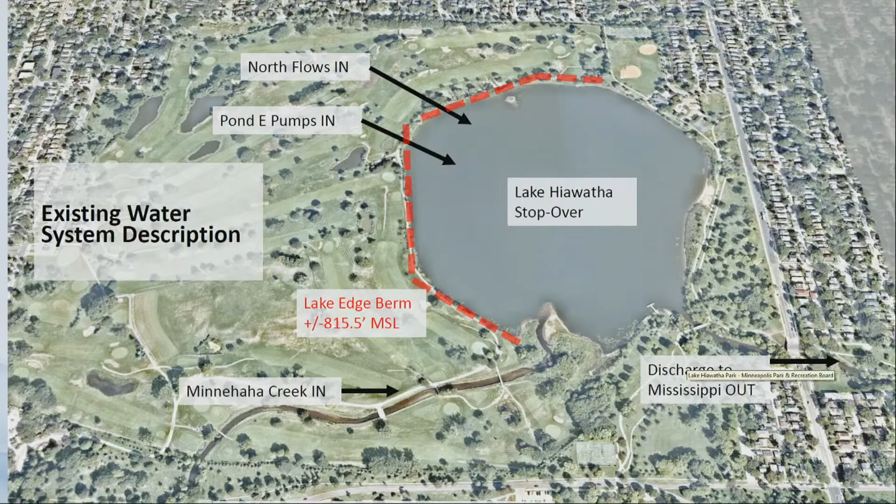North side, you've got flows coming in off of the urban watersheds that flow directly into the lake where they stop over. And then there's flows that come into the golf course ponds, and they're actually pumped up and over the berm into the lake, and they go down to the Mississippi. So there's 3 main sources in, 1 source out, and there's a berm on the edge at elevation 815.5. So that means there's about 2.5, 3.5 feet of freeboard on that shoreline. I happened to be out there last night, and that's about exactly what it looked like.

So over time, with more development, more urbanization, there just happens to be more flow. You could also argue, global warming or not, that there's more rainfall as well. And so more flows coming down Minnehaha, more flows coming off the urban watersheds, and the lakes have to operate higher. And what I mean by lakes, both Hiawatha does, and to the south, Lake Nokomis does as well. Because if you released more water from Nokomis, it would actually pile up Hiawatha higher.

And it's funny because Nokomis is actually just a little bit higher than Hiawatha, and there's a chance to maybe connect the 2 things together, as Tom Oslin had said, and sort of have a 2-for-1 benefit by what we're going to show you tonight. And then one of the park board's main goals I hear over and over from a lot of you is we need to reduce the amount of groundwater pumping.

Because as I showed in the earlier YouTube presentation, Minnehaha Creek comes down, it ends up in the lake, it leaks down into the area underneath the golf course, it mounds. We pump it up to the lake, it leaks back down. We pump it up to the lake, and so that just pumps in a circle, and that's the $5,000 a year or so in electricity costs to pump that water back up and keep the golf course and the residents dry currently.

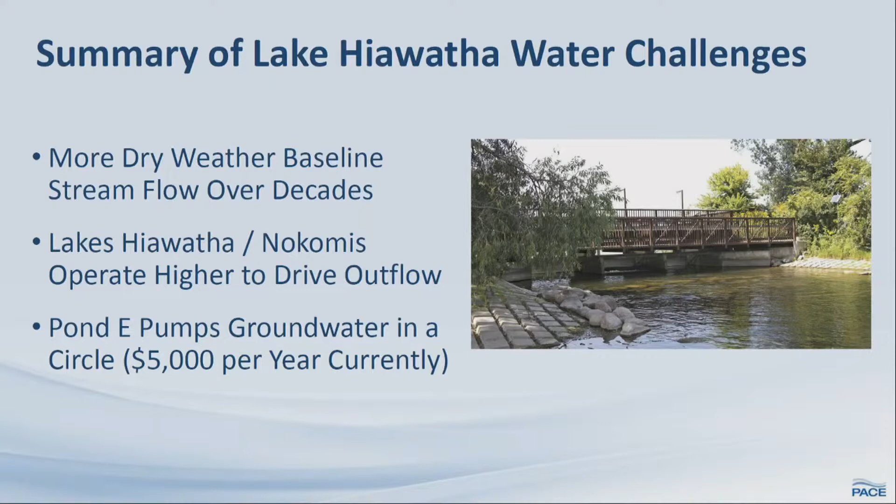So why can't we get more water out of Hiawatha and just solve that problem easily? As Barr pointed out, this is a figure from their report. Here is a profile of the ground at the bottom of Minnehaha Creek downstream of Hiawatha on the way to the Mississippi River. Water at Lake Hiawatha is at about elevation 812. And as it wants to flow out by gravity, it runs into restrictions at 28th, 30th, and further downstream.

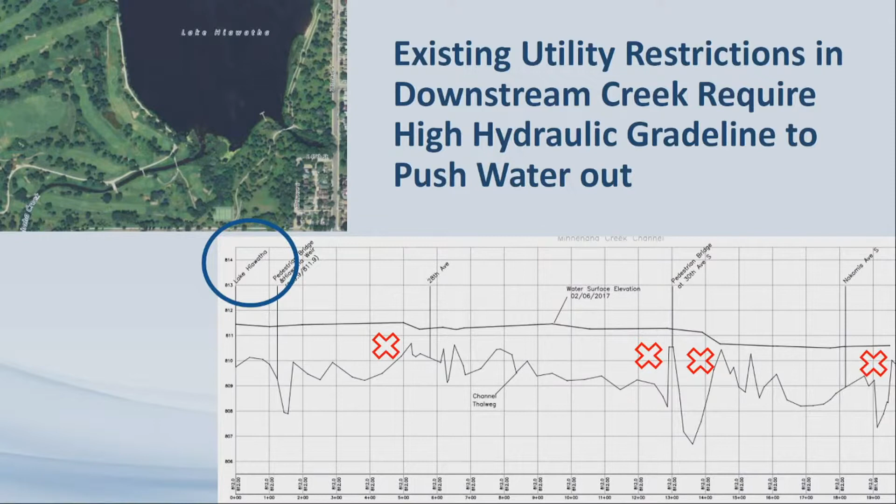And so in order to solve that problem, the city of Minneapolis would have to go in and remove large sewer tunnels and gas lines and things like that that are pretty much infeasible. And so the master plan rightfully pointed out that long term, the only way out of this mess is to raise the water surface. So we got to raise it in Hiawatha, we got to raise it all over the place in order to drive this water out. And I fundamentally agree with that.

But when I read the Star Tribune article 7 or 8 weeks ago, and I'm just a volunteer for 7 weeks on the job, if you will, I thought to myself, if you're going to solve a flood problem, why would you pile more water up? And that's kind of what alternatives 1 through 5 do. They store the water on the golf course.

And so here's the lake over here on the right. The water would then pile up the way it's supposed to, but then it would back water on top of the golf course, so it would be seasonally flooded when flows come in, and it would be permanently wet on a large majority of the land. And I'll show you a plan view here in a minute. So that causes more basement intrusion in the surrounding properties.

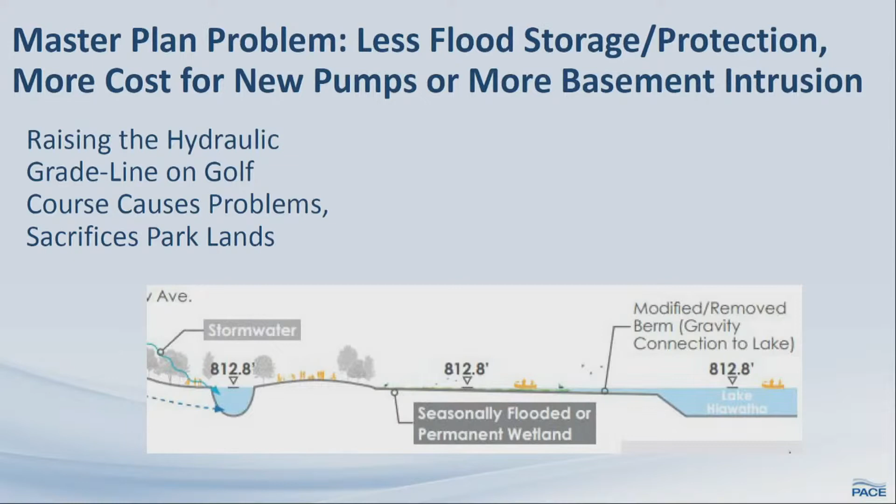There's some houses on the northwest corner that are very low, and they rely on that pumping to prevent flooded basements. But more importantly, when water comes down, it's coming down heavier and heavier every year. It used to be 300 cubic feet per second, then it went to 400, then it went to 500. A lot of water's coming down. We need a place to put that water.

So, as I said before, 5 alternatives from the Barr report. I just chose arbitrarily alternative 4, and that's what's shown here in front of you. And as I said before, the solution, if you don't look at the black arrows that I drew here, was to essentially bring the water in from the northwest, store it on the golf course lands, and then they had proposed actually an open channel, a new opened creek, if you will, to put some of the flows into the lake. And then you have Minnehaha flows doing what they do, which is to go through the lake and out. So those are alternatives 1 through 5 in a nutshell.

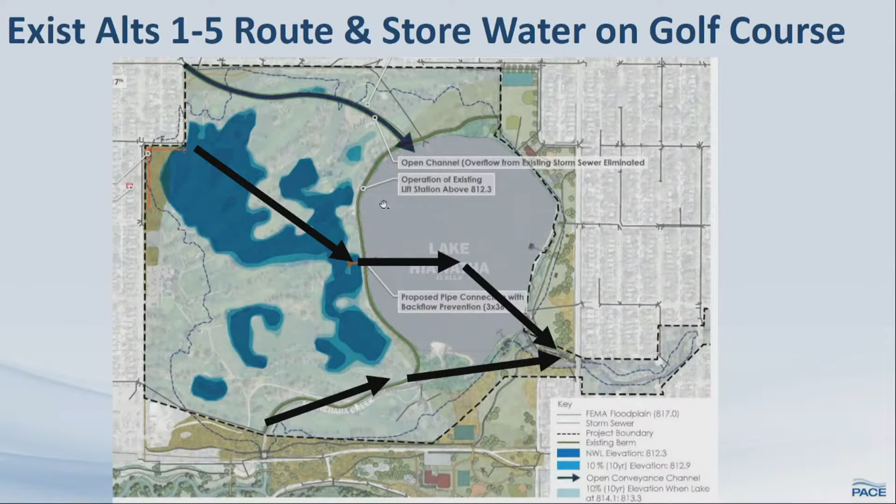But what if we considered alternative 6, which was keep that open channel on the upper north part of the golf course, just like was shown in the Barr report. But the flows coming in here in the northwest, the low point, instead of sending them into the course and flooding the course, why not send it up to that same creek, bring that around, and then when it gets to the lake, just don't put it in the lake. So just go clockwise around like this, go counterclockwise around like this, and shoot it out of there.

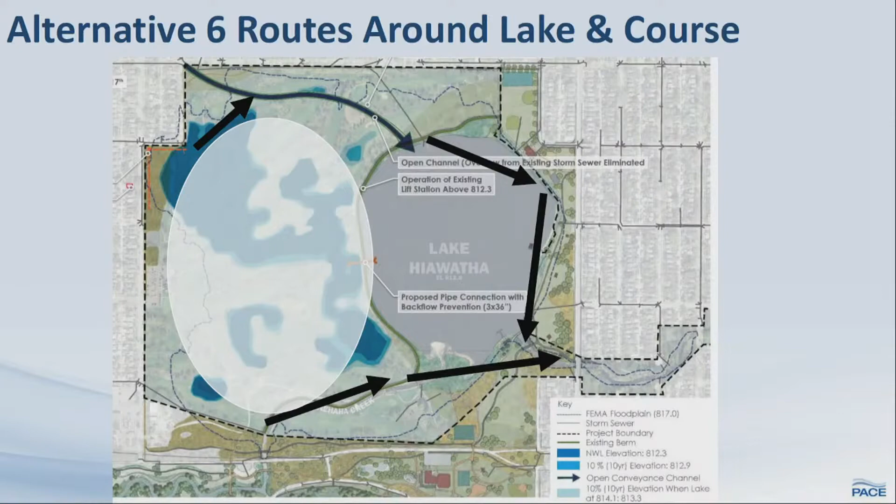And I had previously suggested to pull Lake Hiawatha level down to give the park board more land. But as I talked to a lot of you, that was a terrible idea. And so now I'm proposing, let's leave Lake Hiawatha alone. It's operated over the years between elevation 810 and 813. Let's leave it at 810. That's a nice elevation. It keeps everybody dry, all the neighborhoods dry. And accordingly, this is what the concept looks like.

So I'm going to spend just a second on this slide here if you want to take your time and stare at this. But essentially, a new naturalized creek would go counterclockwise along the north side, and that would operate and flow down whenever flows come out of the neighborhood. And then it would combine with flows from the south coming from Minnehaha Creek, which would also be renaturalized. A lot more riparian wetland habitat, more biological diversity, and it would make its way out.

And now what that would do is it would allow the water surface to pile up any way it wants to. So if it's dry, drought, we're down to 811. If it's moderately wet, it's 813. If it gets even wetter, it's 814, it's 815. It can go as high or as low as it wants. It's going up and down like a natural system, and it's exiting the property.

And on the other side of that berm, you've got Lake Hiawatha, and we would just basically have a toe drain system that would connect the lake with this upland area here, and we would maintain a low pumping rate because we're not trying to push water up there anymore. We're just keeping it in the natural condition, and we would just lift that water out of the toe drain and into this creek, and it flows. So that way the creek stays fresh.

It doesn't get stagnant. You've always got flow coming from the north. You've got flow coming from the south. You've got a beautiful natural system. In this case, the beach would get relocated over to here. You'd have walking trails, bird watching, hiking, etc. along this naturalized zone here between the lake and the creek. And you would have a lot of benefit on the project and retain the land use.

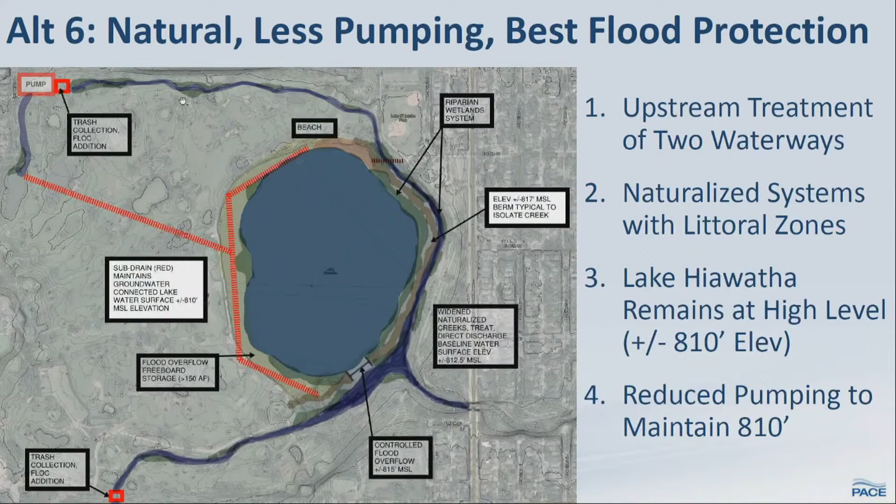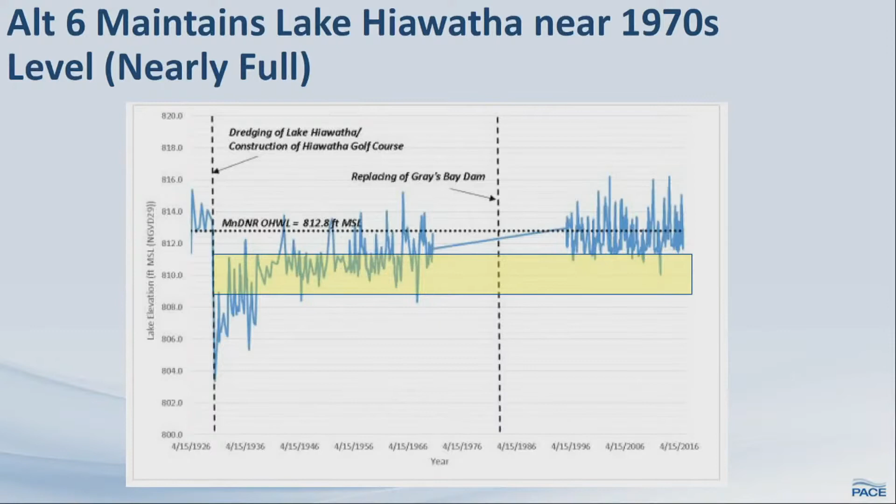So here from the Barr Report again, I keep stealing a lot of content from there. 1930 through 2020, you can see the lake level at Hiawatha. In the last 30 years, it's gotten up higher and higher and higher, around 813. I'm proposing in Alternative 6 that we would basically set it back down where it was in the 1970s, 60s, 50s, etc. You got a couple feet of freeboard for water to go. And so by doing so, you'd have protection of the entire site from a 100-year storm event.

So if you look here, the water surface elevation, there's two different ways that Barr calculated what it would be. It would climb in a big storm event. So a 2-year storm event, it would go to elevation 814. In a 5-year, it would go to 815. In a 10-year, it would go to 816. Well, the berm that kind of divides these creeks has an elevation of 817. So nothing will ever damage the property.

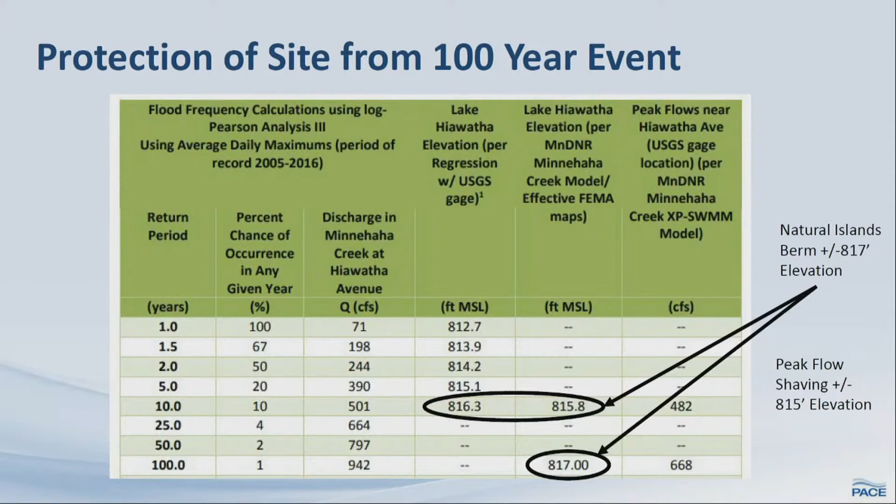However, we're going to shave peak flows as the water surface gets up above 815. And what I mean by that is, as water's coming down in this big catastrophic event and water's pouring down into the site and headed to the Mississippi, when it rises up, we'll be able to bring a little water into the lake. The lake can then rise from 810 to 811 to 812 to 813, and we can store 150 acre-feet in the freeboard of the lake without damaging the golf course, which is 12 hours of 150 cubic feet per second.

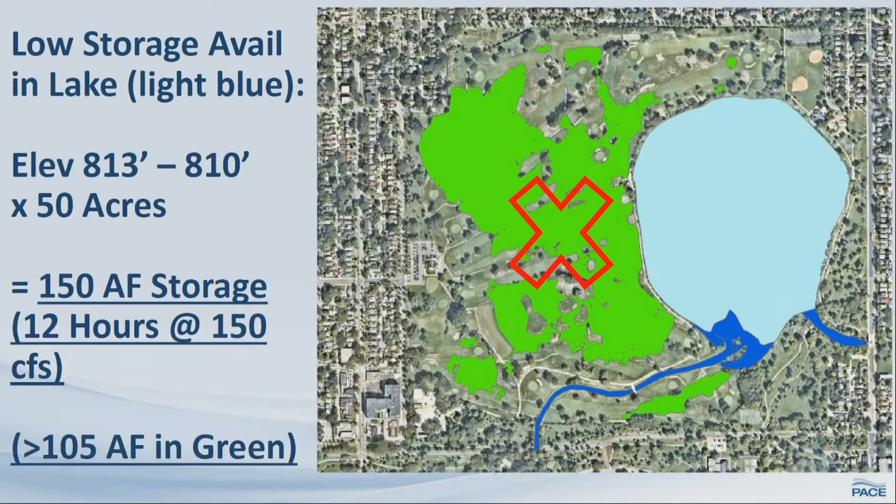So if you look at all these Barr reports like I have, it's a lot of water for a lot of time that you can store in the lake as a secondary relief point for the water heading out to the Mississippi River. And just to point out, that amount of storage in light blue is greater than all of the volume here in green, which was previously shown on the flood maps.

So I hope you agree with me that this Alternative 6 solution, if considered, would be a win on water quality and flood protection, a win on improved ecology and park uses. You'd have more dry land and more things to do on the park. And number 3, you'd protect the historical uses of the site and the existing feel. It would feel just like it does today, only improved. So with that, I'm going to hand it off to Tom Lehman and answer any questions.